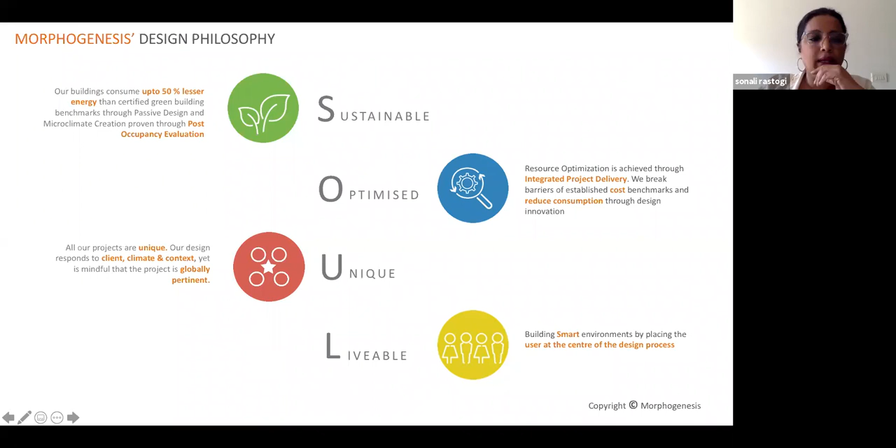So in this scenario, when everything's been turned upside down, I want to talk about three aspects of morphogenesis' work: residential, commercial, and workplace.

So now when we talk about residential, I'm not at all planning to write a thesis on all that residential covers, but at the moment I want to bring some questions and some thoughts to the table.

One of the thoughts I have had, and morphogenesis has had for the longest period of time, is why are our cities filled with 40-50% migrants? Is it necessary for everybody to migrate to such a distance that they only go back to see their families once or twice, or their communities once or twice in the year?

So whilst we are busy designing courtyard clusters for families and communities to get together, 50% of our city populations are actually people living away from their families, or living in absolute squalor when they do live with their families. This migration issue has required some rethinking for a long time.

Instead of having these high density nodes which keep densifying, like cities like Delhi, Calcutta, Mumbai, Bangalore, Hyderabad, and more recently a couple of others, Pune—these are the cities really reeling under the effect of the pandemic—should we think about getting more and more FSI, more density, building transit-oriented development that gathers more people on the same location, giving the city the ability to dig a few more basements and go a few more floors higher every couple of months?

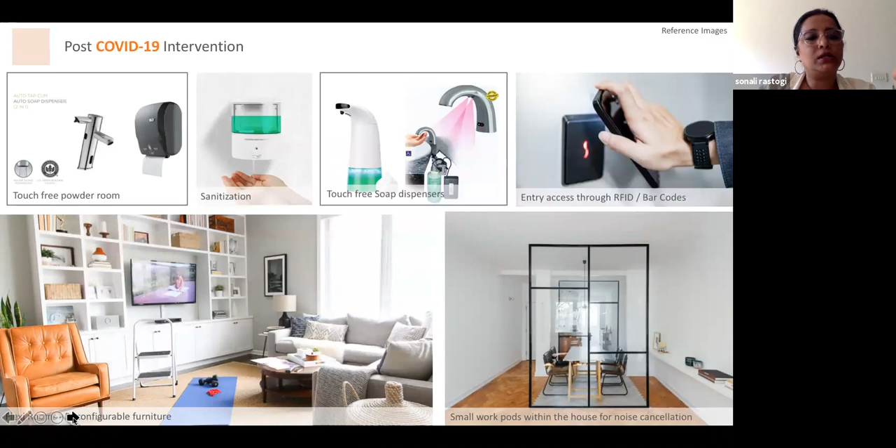So are dining rooms now going to be the new workspaces through the day and family community space at night? Or actually, there'll probably be no day and night - I read TCS is going to put 75% of its people on work from home anyway. So maybe that differentiation of day and night will also start reducing. There was a phase when we moved into more open plan, sort of casually called New York loft style living. But now are we going to go back into this pod and noise cancellation and co-working at home kind of living? These are just images I'm collecting. I don't have answers - these are just thoughts and images which I'm opening to this forum today.

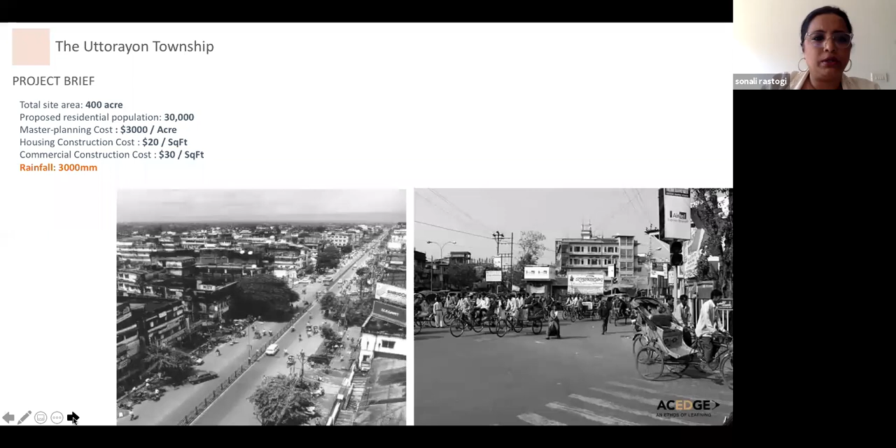I went back and looked at a residential project we'd done many years ago in Siliguri. This was a low-rise villa cluster development, and it has been inhabited now for over 15 years. It was designed - the cluster planning and town planning - on a basis of equity, ecology, and economy, and this today has found new meaning for me. It was a 400-acre site, residential population of 30,000 people, and housing construction was just $20 per square feet, which is not much, and I think probably relevant even today.

Now this is a typical cluster which I want to come to - and this slide is an old slide. So at that point, 15 years ago, we talked about communal space at the heart of each cluster to encourage citizen interaction and social equity, so that everybody has access to the same open space and everybody comes to the cluster.

Now, at one level, we are talking social distancing. I want to share a personal experience. I live in Panchsheel Park in Delhi - it's a small colony, not very large. Even in that, I have found that people have put up gates and localized themselves to particular blocks, and they get a sense of safety from the RWA chat of that block. They say, oh, so-and-so is walking, okay, I'm going to ask him not to walk.

Does somebody have neem leaves, dried neem leaves, I'm getting a pest infestation? If anybody is arranging for bread, can they arrange for me? Suddenly community conversation which was unheard of - people are asking to share bread and dried neem leaves. It's incredible. These are stories I'd heard from my grandmother, that in the days when things were not plentiful in many ways, communities used to share. I've had people sharing pickle from 10 houses down, because pickles run out.

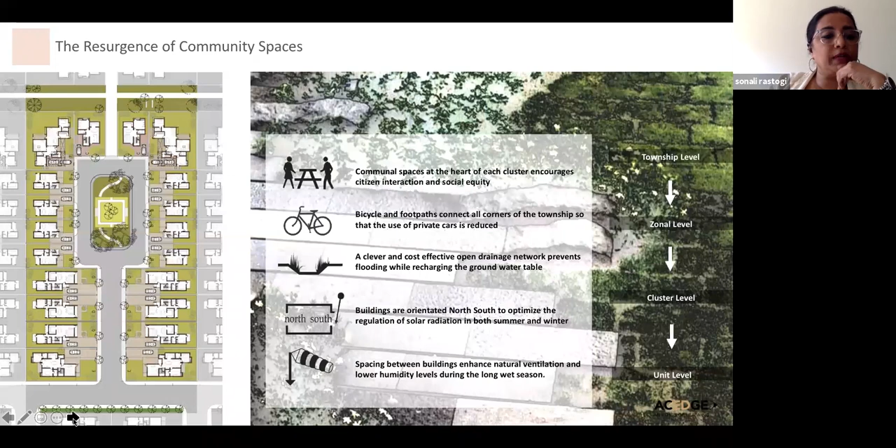I'm fortunate that I have a large porch in my house, so right now all my cleaning, hand sanitization, dog paw washing—that whole area has become that. Even my dogs, when they come from outside, wash their feet, because you don't know where the virus lives. I can't bathe the dog each time, but God knows whether it'll come to that, or whether I'll have dog masks eventually. But my dogs wash their feet in front of the house now. Similarly, I sanitize my hands.

One is hearing of a lot of sanitization potential. I feel every house is going to do a touch-free powder room and sanitization at the entrance door.

Small work pods within the house for noise cancellation are going to become a very big deal. I know there are gadgets in testing—a palm-sized pod you place next to you that becomes noise cancellation when you're talking on webinars or having work meetings. Those kinds of things that were already under research will actually find their place in every home.

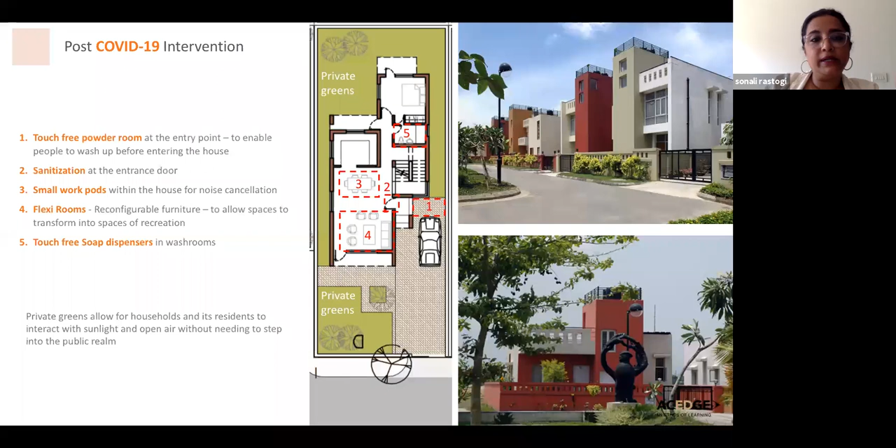Touch-free, whether it's soap dispensers—I think towels being used and shared by people is going to go out of the system completely. You're going to have hot air hand drying and touch-free soap dispensers. I'm thinking of these only from what's already there; I'm sure there will be a plethora of inventions, and that's where the opportunity lies, even for us as designers.

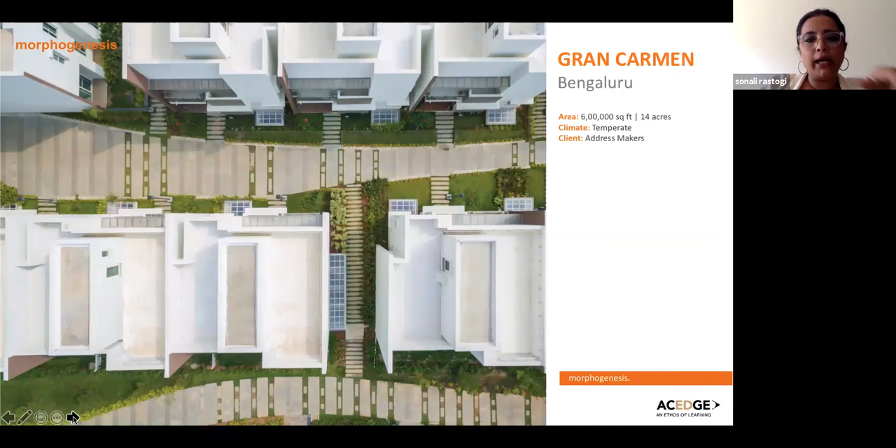This project, Gran Carmen, is on the edges of Bangalore, with a mostly young IT population. I chose this out of other projects to show you because it's a completely car-free environment, and entirely green. People enjoy a very healthy lifestyle—there's not a single road on the surface.

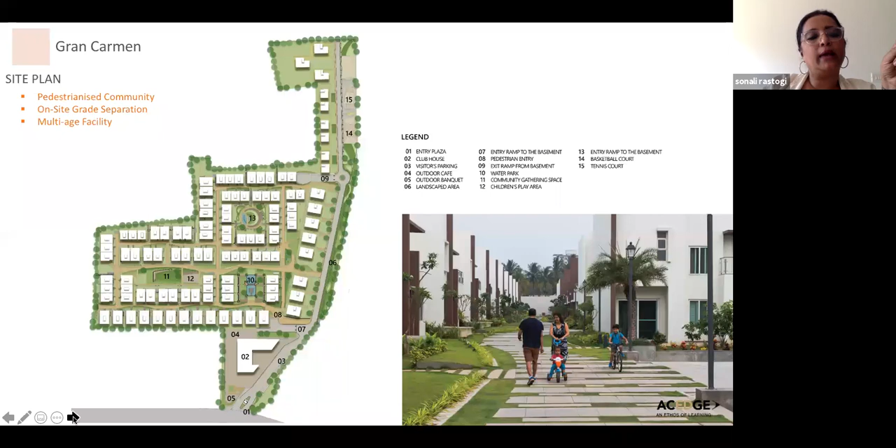What happens is, right at the beginning, there's been grade separation of all vehicles. People are going to be so grateful that they have this situation, because all their deliveries will happen at that lower level you see on the right-hand side of this plan.

Cars and outsiders all come down below. In the basement level, which is grade separated, there is also a lobby. So I can very quickly see that that lobby becomes a sanitization hub, and all outsiders are coming to the basement. So the environment of the community in some ways is likely to become more sacrosanct, because no outsiders are coming there. And if someone comes, they will go through sanitization in the basement lobby of any one of these homes.

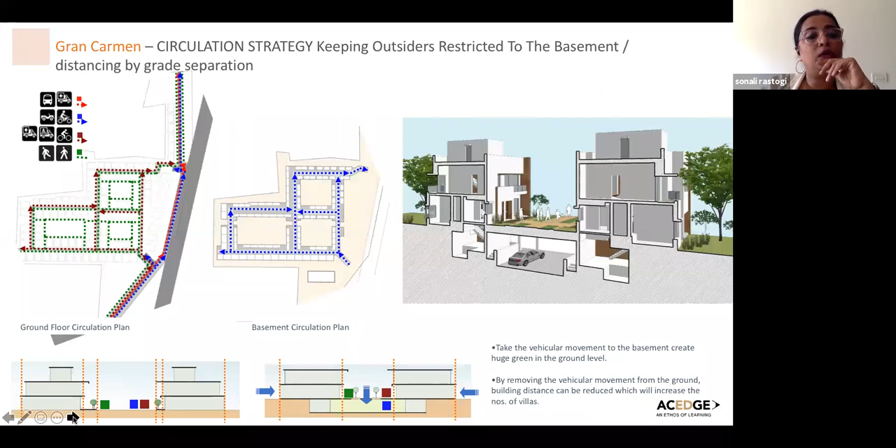I don't know if they're thinking this, this is what I'm thinking. If I was asked what they should do, this is what they would do. So this is that grade separation. It's daylit, it has natural ventilation, and people enter their homes from here, and there is absolutely no possibility of entering it from the top.

So in the aftermath, now let's go to commercial projects. In the aftermath of COVID-19, I've been thinking about how people will react to the immediate environment, because commercial projects draw a lot of unknown people. Even in your workplace, in your home, you know what the people are. In your communities, you know what the people are, or you will get to know soon, if we've forgotten over the last two generations perhaps.

In commercial spaces, you don't really know. So we are redefining what interaction with the immediate environment means. I want to take your thoughts back to when we quickly moved, aping the West, even in India, to hermetically sealed glass buildings. We opted for that option in terms of efficiency of building, and actually even cheaper to build perhaps, versus natural ventilation and sunlit buildings.

Of course, we work with sustainability standards. We try to advise that buildings shouldn't be deeper than a certain width of floor plate so that we get some sense of daylight. But ventilation, I think, is actually more driven by what the fire officer needs, 10% open, rather than looking at what commercial people who work in their spaces need. And whatever happens to the HVAC system happens.

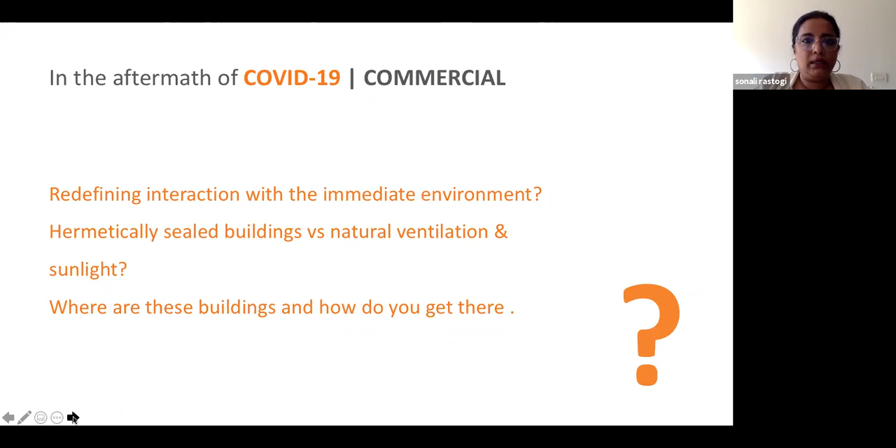Then, those of you who are interested in biology, and almost all of us have become since this virus, buildings have to become like their own microbiomes, right? They have to develop their own environment, which is stable. I think that's what needs to happen. So it will include design, it will include technology, it will include sanitization in addition to technology.

Now, is that sanitization happening by first reducing the number of people who come there? Of course, we've talked about density, we've talked about using technology like pods for delivery and so on and so forth. But then we are also talking about tunnels. So far we have talked about great lobbies with great furniture, great chandeliers. We've talked about lobbies becoming workspaces, meeting spaces. But now, actually, lobbies are tunnels.

So is that how building entrances are going to be defined? We come in through a process of sanitization. Post 9/11, we went through having security and body frisking, and got used to the idea of raising our hands while security devices scanned all over our body in public. I find that notion to date very violating. And now we have tunnels.

So will the building entrances be redefined? Will they be such that we walk in and there are temperature measures or whatever parameters are set for figuring out your health, also for you to get a sense that the building you're going into is healthy? We subject ourselves to the amount of security check that we do because we feel safer once that is done. So will we be subjecting ourselves to so much inquiry about health because that will make us feel the building we're entering is safer?

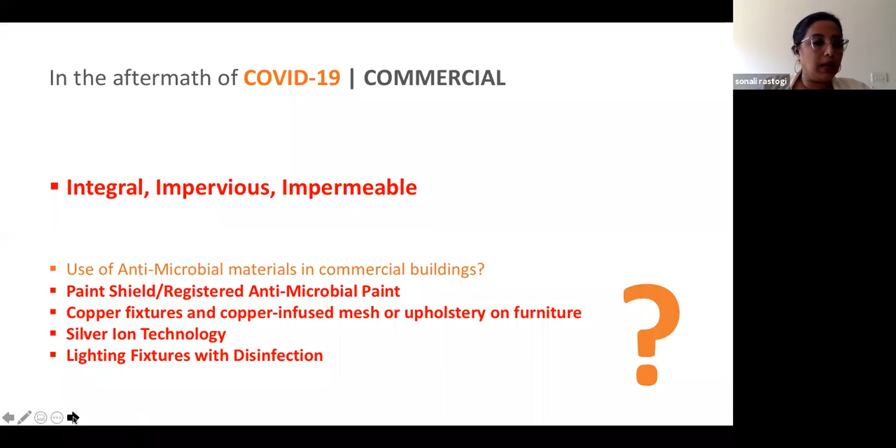And these are growth areas, I think, for all of us designers, where all of these things will become key to how our buildings are designed. People are talking about lighting, the metal in the lighting fixture, which is more sustainable, versus using ones which are more cleanable. I'm not the expert to know what that is.

Now, this is a quick sketch that I want to share with you all. This is how the people movement pattern works - something will be scanned versus touched. And then the queuing up will become much longer, because you're going to queue up 1 meter further from each other. So I think in retrofitted projects, and maybe even in other projects, the grand lobbies are going to become queuing lines like this, with longer queuing lines at 1 meter distancing.

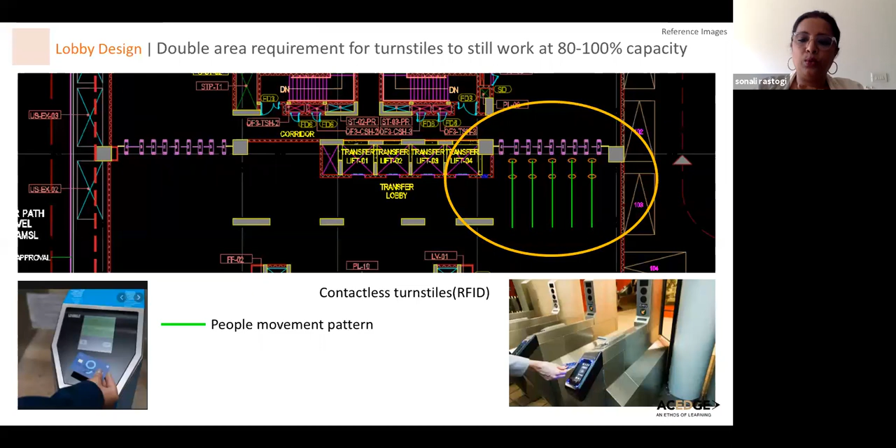So these are, again, there's vehicular - the diagram you see on the right hand side is a vehicular sanitizer gate. So your car comes in and it gets sprayed on the outside if it's carrying anything, so at least the outside is sprayed. Then when you reach inside, you go through a sanitizing tunnel, then you reach a lift, so lifts will be carrying fewer people. Now the question is, will that mean buildings will have to get more lifts? Because a lift that could carry 20 earlier can carry 6 now, as you can see in that image. Or is it that there'll be fewer people at work anyway? Or is it that the impatience of right here, right now will have to change? Let's wait, it's safer.

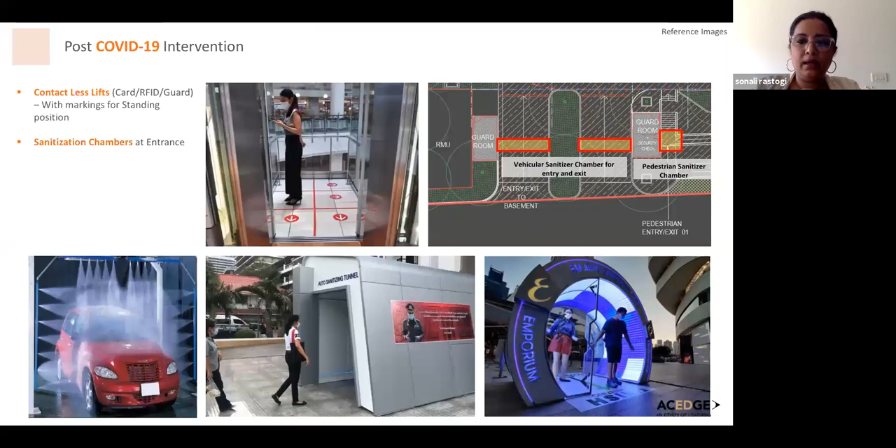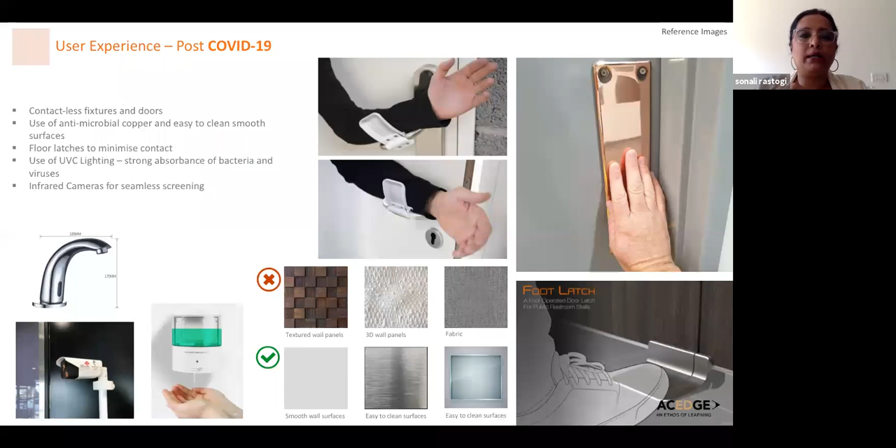Now, this is again a collation of various products that suddenly have been coming in, and I think these are what you'll see in commercial spaces tomorrow. Look at the way the foot is opening the door - it's a touch-free door. You will be wearing full sleeves clothes that work most of the time, unlike us architects who wear anything we feel like. I think people will be formally attired, covering as much of their body as possible at all times - formal is not the right word, people will be wearing maximum coverage clothing. And probably the clothing materials will have a virus shield or bacteria shield, and that's how all our hardware design is going to change.

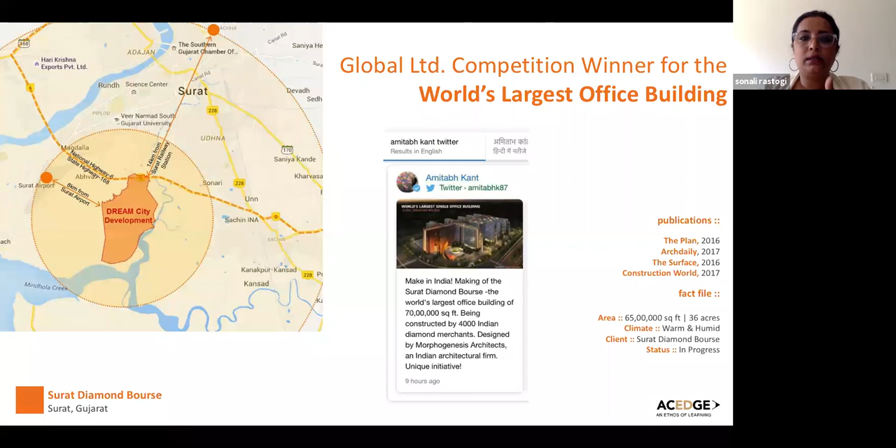So I would like to talk about a commercial project. Now, this project is an ongoing project of Morphogenesis, the Surat Diamond Bourse. It is the world's largest commercial building, world's largest single building. For those of you who don't know, it's getting built in India, nearing completion in another 12 to 15 months. Most of you probably never heard about it, but that's the way we are, which is why I believe our design voice needs to be heard around the world. Right now the world's largest building is the Pentagon, and this is larger than the Pentagon, and it belongs to one single community, the Diamond Merchants of Surat. It's a commercial building because it's all offices and everything that enables the trade of diamonds. 95% of diamond trade in the world will have some connection to this building, either directly or indirectly. But more importantly, this is going to be the world's largest building, and the competition was won based on seeing how efficiently we can move people, yet meet all their requirements, make an architecturally iconic building, and deal with the unique challenges that come with this profession.

This building moves 65,000 people in under 1 hour, every single day. So travel time from site to individual offices is less - actually, we achieved it at 7 minutes. Waiting time is 30 seconds right now. That's what it's designed to.

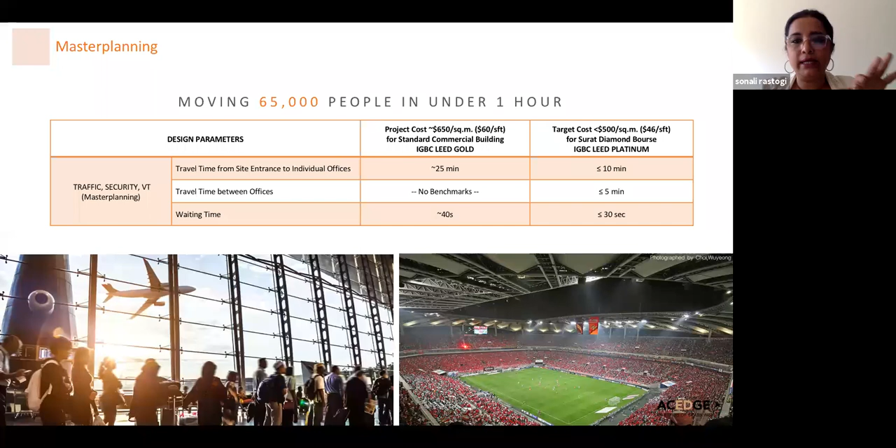Now this site has been very proactive because, being the world's largest building, it's preparing itself to restart construction. Given the fact that in India we still have, despite all the technology, a large number of manual works, if it's the world's largest building, a large amount of it is being done manually in our traditional ways. I would be surprised to think it wouldn't have the world's largest number of labor at any point.

So the sanitization chambers have already been put into place at all entry points to the site. When we saw this image, which was sent in from site, because they asked us to give them locations where we need to put it, they prepared this. Now you look at the 3 arrows that our team put in. We feel that there will be sanitization tunnels, sanitization chambers, and airlocks and vestibules on all tower entrances, which are dealing with design issues emerging out of the current pandemic.

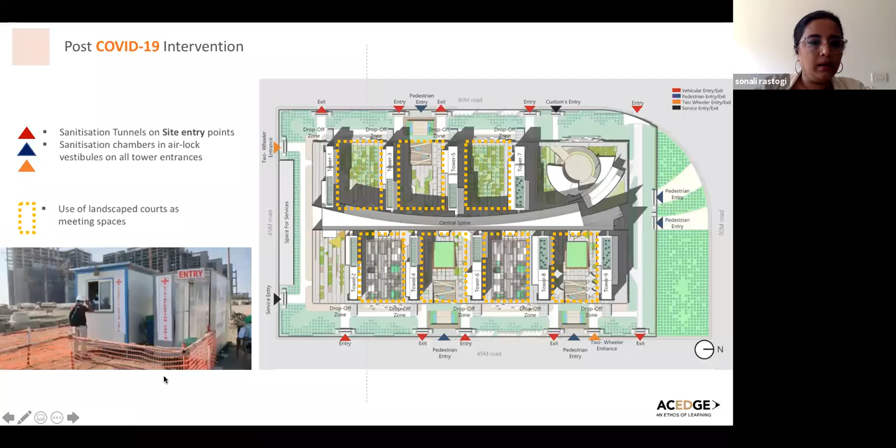On the other hand, I feel that this building is more ready, and I feel relieved, because the size of it is such that if it wasn't ready at all to adapt, it would have been horrific.

So this building, to meet the optimization criteria of cost, actually used radiant cooling, and the entire 50% of the circulation area is actually without air conditioning. It works on natural air movement, it works on stack effect, and it works on the flooring having radiant cooling. So this idea of commercial buildings which are hermetically sealed was completely avoided. This is the world's largest commercial building, world's largest building actually.

So this is, as we speak, construction that stopped of course a couple of weeks back, but this has been going on for the longest. I can't remember the figure, but it's some 28 kilometers or so of corridors which are getting this radiant cooling, and therefore are not air conditioned. You can see all the large openings on the side of the entire circulation system, and this is ventilated.

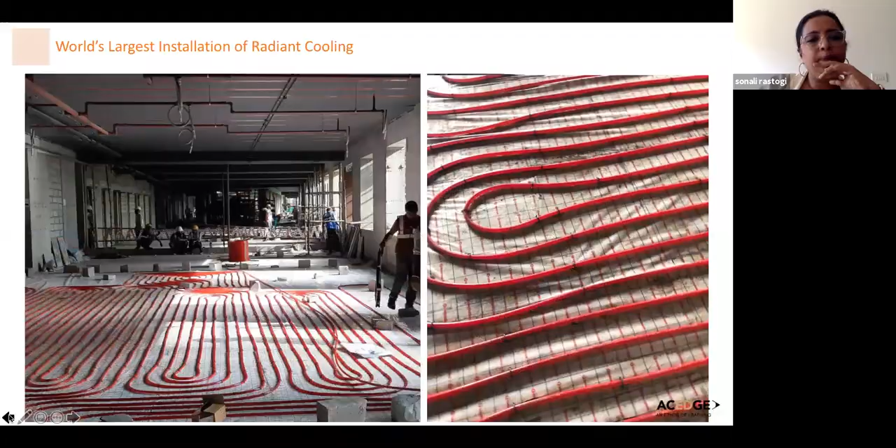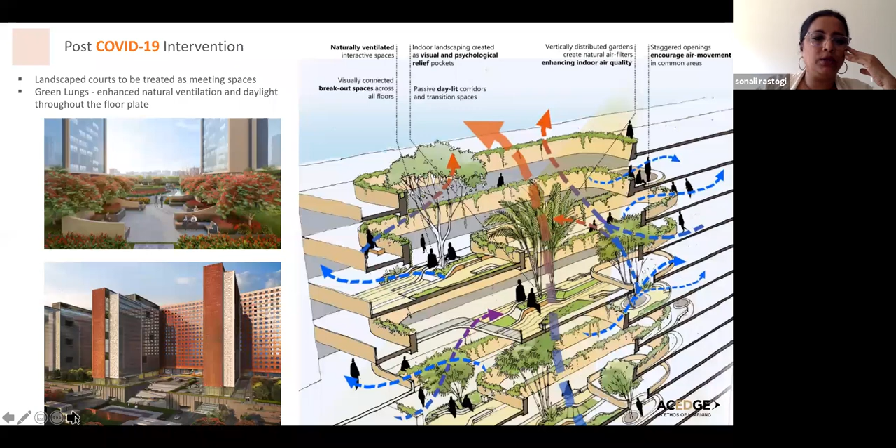The reason this is so is we are expecting a lot of transactional nature of this trade, where they move around outside, transact small quantities of diamonds in portfolios. Sorry, I'll go back to the previous slide. That's why, as you see in the diagram, all the corridors are designed with these green lungs, which feel like parks. Which is why there's the undulating form of the corridor, as you would have noticed in the images. And these corridors have this.

Now this is the project in construction. This is how far it's got, about 2 years of work. So I think the pace is not bad. Maybe, I don't know when it restarts, but I think soon, maybe 18 months, we'll see this project finished.

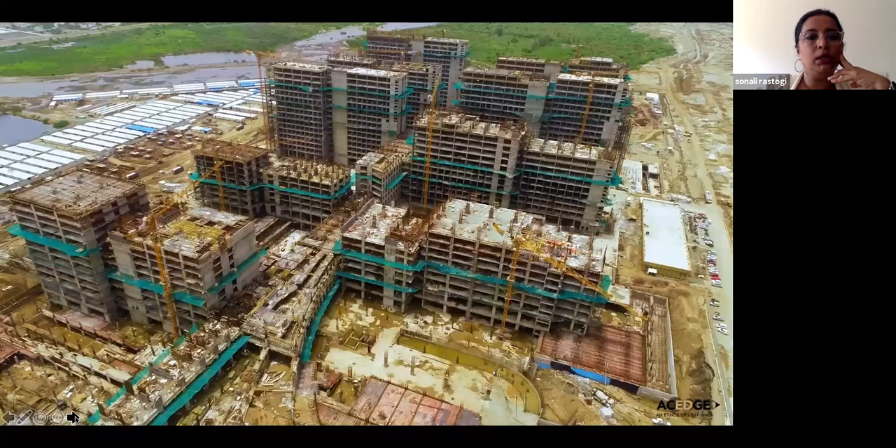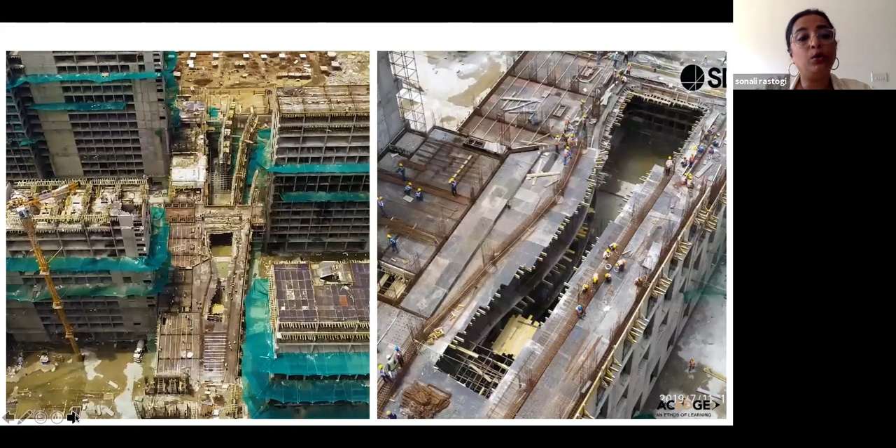So these wavy forms that you're seeing are those indoor-meets-outdoor spaces I've been talking about, where people will be protected yet able to carry on and able to meet. So the smaller offices, which are 300 or 500 square feet, no longer have to meet people inside their offices, because they can keep people out, all their people they're trading with. This idea, which was one of the competition winning ideas, is probably going to be the savior idea now.

Okay, so I want to bring to you some more questions about the workplace. I'm being mindful of the time, I know I have very few minutes left. So I just want to ask: is this the end of the traditional office, or are we just going to retrofit it? Are we going to just put screens around each person and still make it work? Because you can't end the entire world's office space, right? So is it the end of the traditional office space?

What is the role of design in reevaluating face-to-face communication of people? Is social engagement possible in the age of social distancing? Especially companies that we all admire, Facebook, Google, have spent like 50% of their work area on social engagement with each other. So what changes in the age of social distancing? Or is it that since you're not going to socially engage anywhere else, your workplace will be made so sanitized that you're going to do it more and more at the workplace? There are so many ways to look at it.

So I really don't know. Will social distancing make way for workplace distancing? So there are a couple of ideas about workplace distancing.

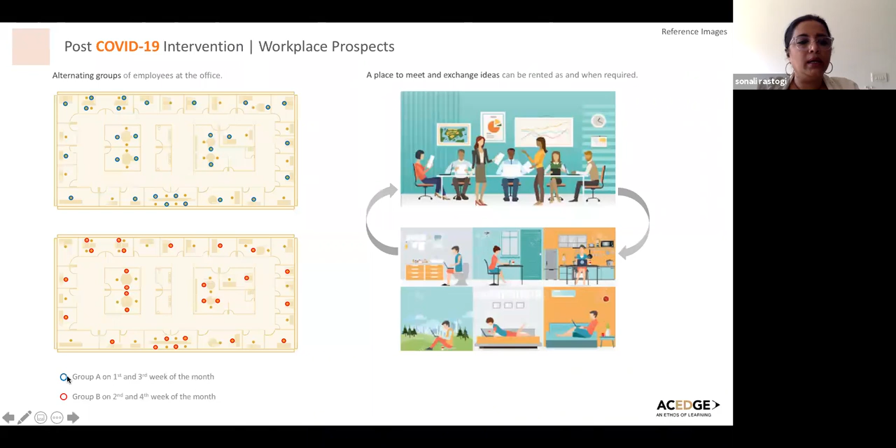Now, very quickly, we found these online. These are already methodologies being evolved for how to work in a common space which is sanitized, but yet maintain social distance from each other. So these are some more anthropometrics, different from the ones we've been moving to. IT companies that I work with, we have actually moved to workstations which are 2 feet by 4 feet, and kind of democratically that size.

Look at this now—this is recommending, again, a larger distance. Probably, if you ask me, this is a space standard which we had about 15 years ago. I remember designing 5 feet workstations across and 5 feet Ls for everyone at the start of my career. So are we actually inventing something new here? No. When I look at it, this space standard was what we thought was correct for humans to work, and we're just going to have to return to that.

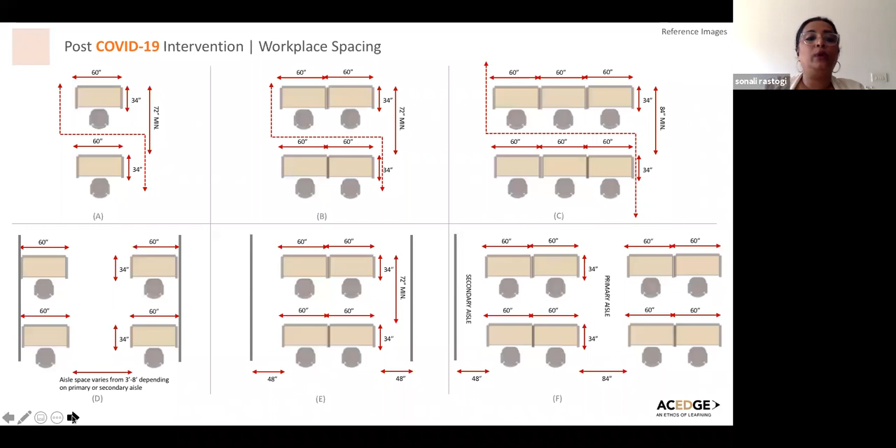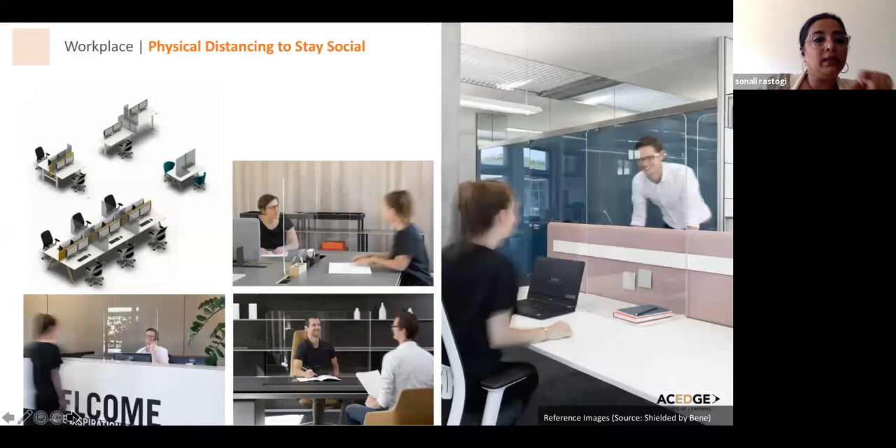So is this what we are moving towards? If there is a choice, I prefer this to having a mask on my own face, but will we have to get used to talking to people through shields all the time? I do think that in the immediate short run, something like this will have huge success.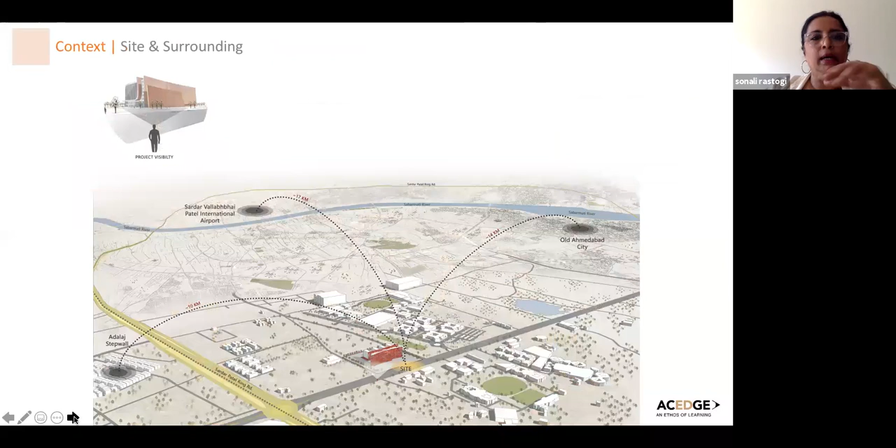This was a project on the outskirts of Ahmedabad, based on our standard sustainability approach. We look at the regional context, use local material, and look at sustainability from a solar perspective and a water saving perspective. Here it was inspired by Kansara art, by Bhungas, and we looked at iconicism, functionality, and sustainability.

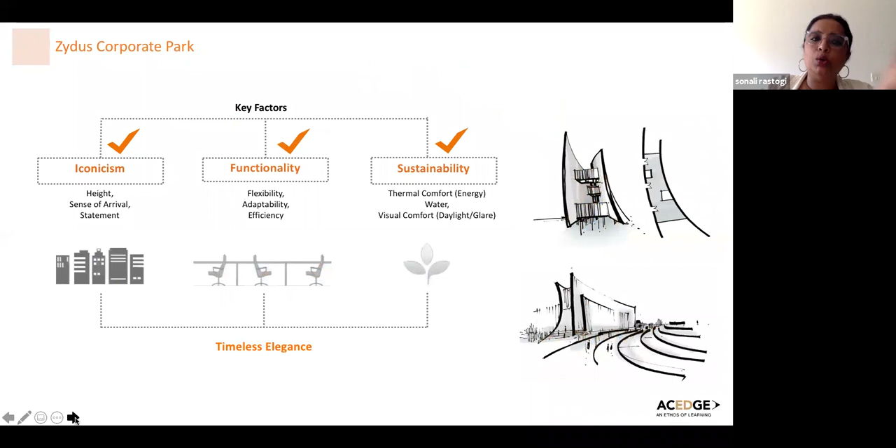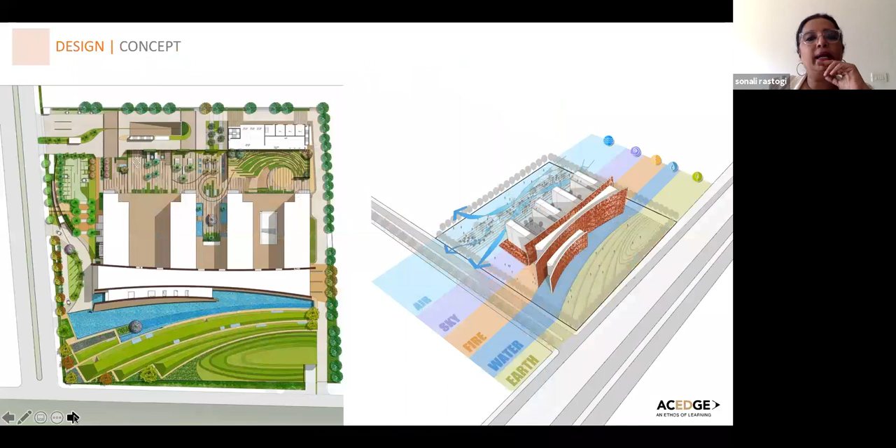But when I look at this building today, I feel quite happy. I feel it's so ready, because this was a building where we didn't cringe on space standards, we didn't pack people. Part of the brief was that people would work in their workspace by themselves, but we created over 100 spaces where they can meet, interact, and leave. A lot of these interaction spaces were agile, individual, and reconfigurable.

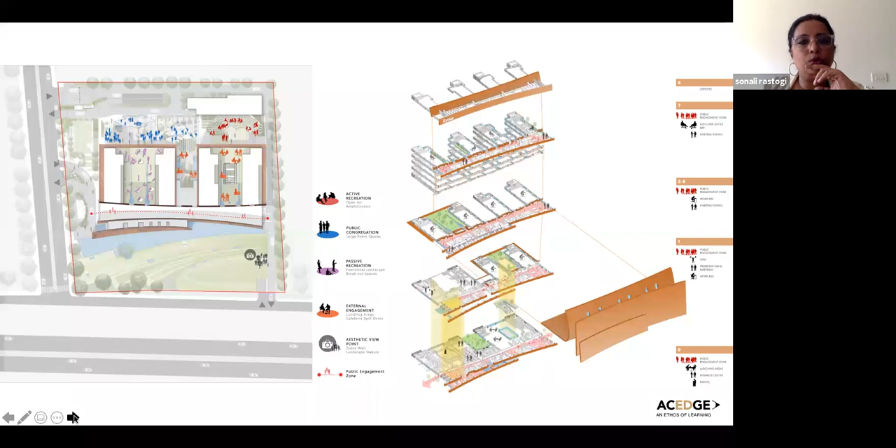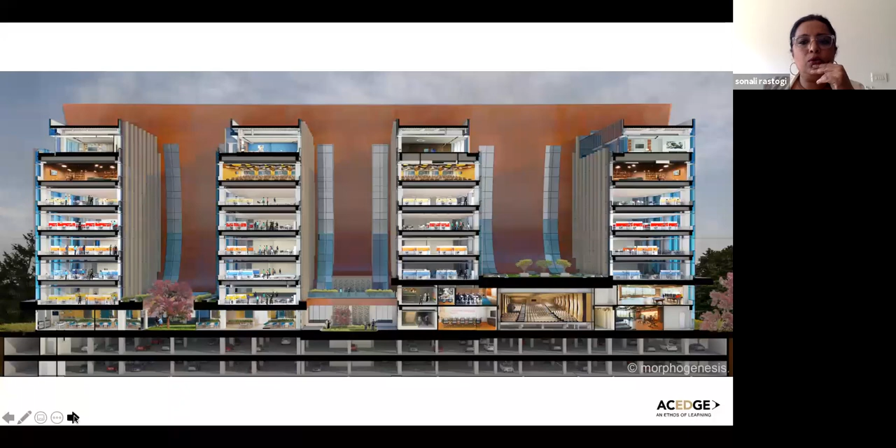That gives me a lot of happiness, because I think one of our most recent projects is very ready for transformation. This is a cross section through the project showing its various activities. 100% of the workspace is daylit. And this is the project.

There were a lot of spaces for people to work outside their office space, and I think this is going to be really the social spine. There was a socially active spine, enabled for work and work conversations, which was 200 meters long, present on every floor, varying from 4 to 8 meters in width.

This is going to actually be the reconfigurable part of the project, where people can have meetings without letting strangers into the work environment of their own department and community.

Every space was daylit. These are actually breakout spaces that you see, and if you look at the furniture below, it's completely reconfigurable. So we can just space this apart. I'm going to recommend that they just move it apart, and we are done.

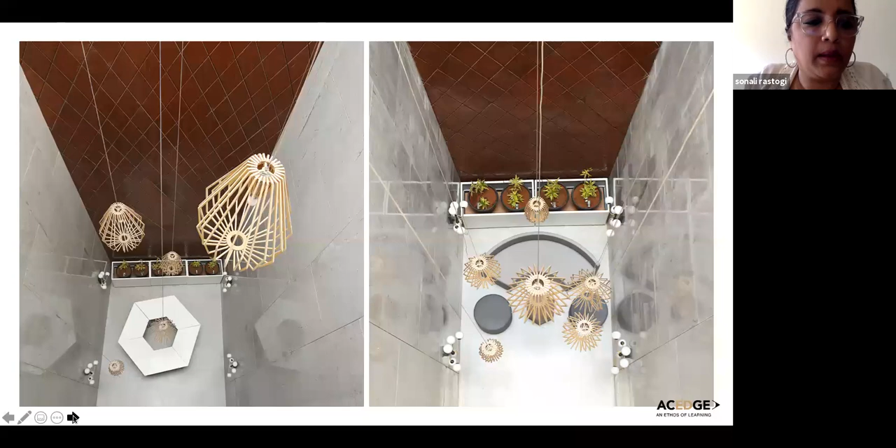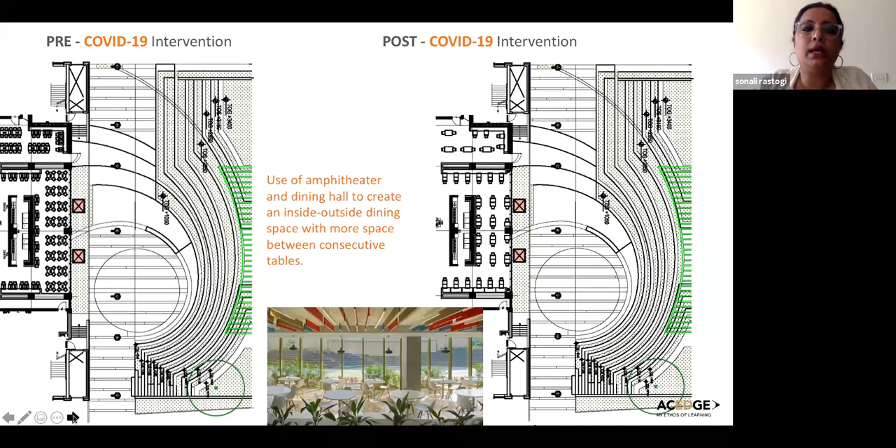Now this image is of their dining room, which is attached to a lot of outdoor space. They will either go into multiple shifts of eating, but you can see from the drawing that it's already quite far apart, beyond the acceptable number. I don't know how and when these numbers will be established, but these connected outdoor spaces, with a few minor changes, can become extension spaces to loosen up the density.

There are diagrams all over the office showing how to reconfigure it for your need of the day. This is going to work for different people coming to work on different days in the same location because of its reconfigurability. I'm quite thrilled thinking of this project, because it was already built for different people coming to work on different days for a completely different reason, not a COVID reason. But I think this project is more COVID ready than perhaps some of the other work.

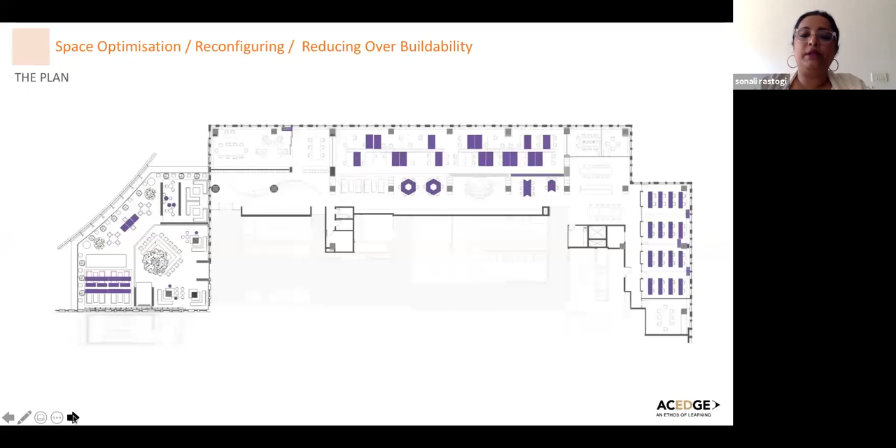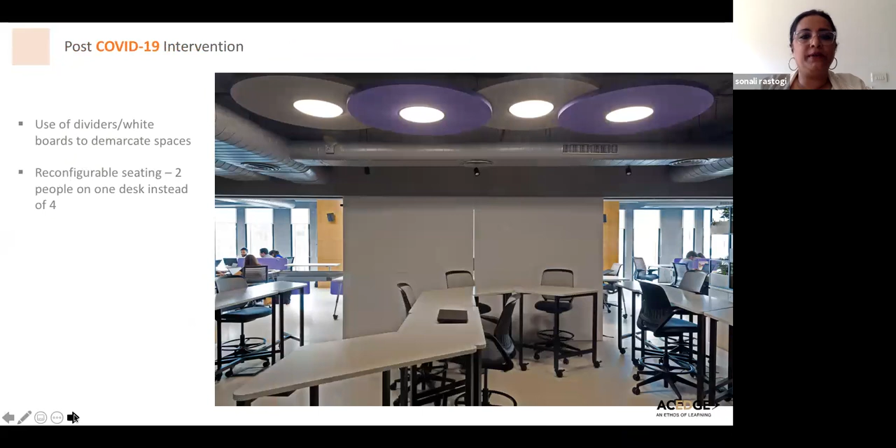So these are reconfigurable spaces, and these pictures have been taken at different times, where they reconfigured it themselves to meet different requirements. Again, you can see the reconfigurability of it. So now they'll just stay apart, like this apart part of the picture is what they'll stay as.

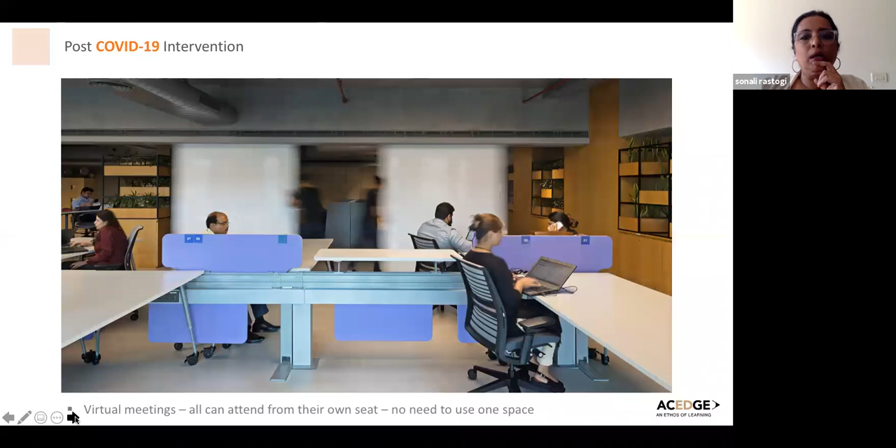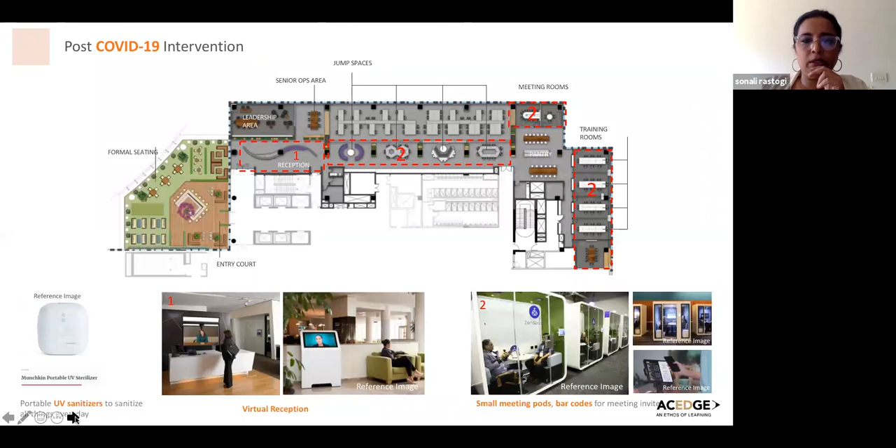Now, so we are now talking about a lot of virtual receptions, small meeting pods. These things will be more, perhaps, that will be in play. So on that note, I would like to finish my part of the monologue, and I'd like to hear more from others. So Geeta, I'm done for now.

Thank you, Sonali, for all those insights into what can be done. It's interesting to see this perspective. COVID, while it seems to have brought us together in many ways that you talked about, where we are sharing and caring, but we as architects, who are supposed to bridge distances, are suddenly considering having to create distances. The irony of it all. And this seems to be also echoing in the questions that have been asked.

I'm just clubbing a few of the questions together, and then I'll get one of the people who put up the question to ask, put it to you as well.

Asking you about what about projects? You showed us five projects that lend itself to morphing. What about those that don't lend itself to morphing? Also, there are many who say, which is what is being reflected in the chats as well, that this is temporary, three months or even two years. What happens if it becomes business as usual once this virus is vanquished? By making these changes in the interim, are we actually perpetuating these temporary mandates? Instead, should we look at temporary solutions?